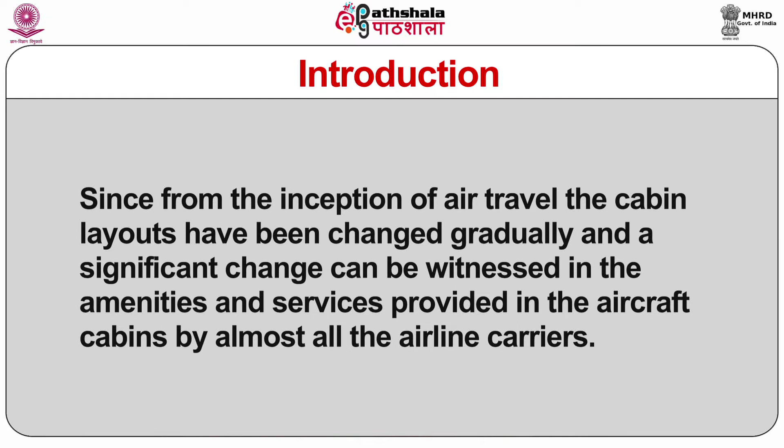Dear students, the aviation industry is now not only a means of travel but also provides a luxurious 5-star category experience at an altitude of 45,000 feet. Since the inception of air travel, cabin layouts have changed gradually, and a significant change can be witnessed in the amenities and services provided in aircraft cabins by almost all airline carriers. Air travel is perhaps preferred as the most convenient, safer and faster medium of travel, even to the remotest areas around the world.

Passengers travel in the passenger cabins of aircrafts. Airline carriers provide ultra-modern services and amenities to passengers to make their journey a memorable experience. Various passenger carrier airlines, due to growing competition, have come up with innovative cabin facilities to attract more passengers. The present module shall discuss various cabin classes meant for passengers, and it shall also discuss the various layouts of the cabins.

Dear students, let us now take up commercial aircraft cabin layouts with features. Aircraft cabin refers to the section or place where the passenger sits while traveling in the aircraft. Passengers may feel uncomfortable while sitting or traveling due to the congested sitting plan in the cabin.

Cabins used in commercial airlines are divided into various parts or sections on the basis of the class of travelers, areas for flight attendants, space for storage, and galley for in-flight services. The seats of commercial flights are arranged in rows and aisles. The sections or seats are divided into various parts, usually by using curtains or sometimes class dividers as well. Passengers who are supposed to occupy lower class seats are not allowed to sit in the higher class cabins in commercial flights.

The facility of a common screen is available in short-haul cabins, but in long-haul and ultra-long-haul flights, passengers often have their own personal screens in their cabins.

All the parts of the flight are held by the body of the airplane, or fuselage. The pilots of the plane sit at the front of the fuselage, also called the cockpit. It is the area near the front door of the plane, and the pilot controls the plane from there. These days, most aircrafts are also enclosed, except smaller charter planes.

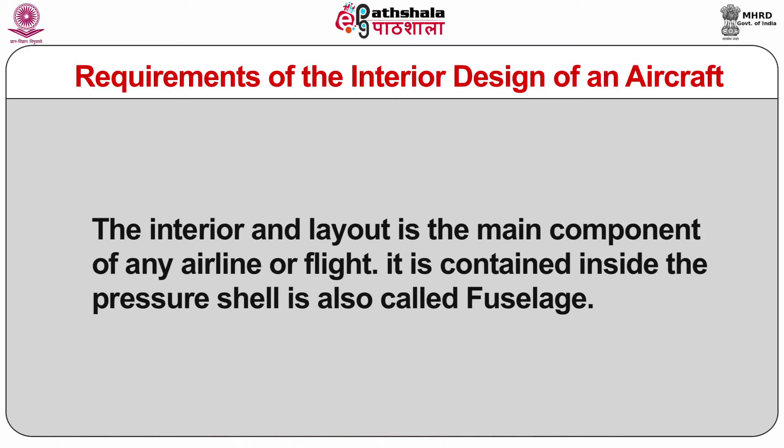Let us now discuss the requirements of the interior design of an aircraft. The interior and layout is the main component of any airline or flight. It is contained inside the pressure shell, also called the fuselage. Regulatory Part 25 of FAR generally applies to it.

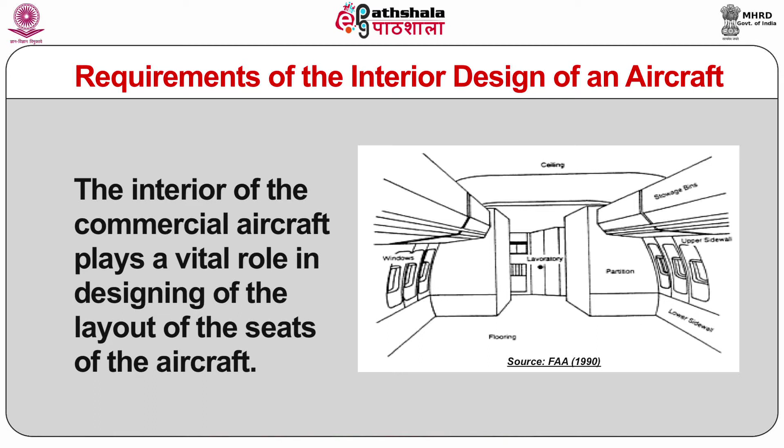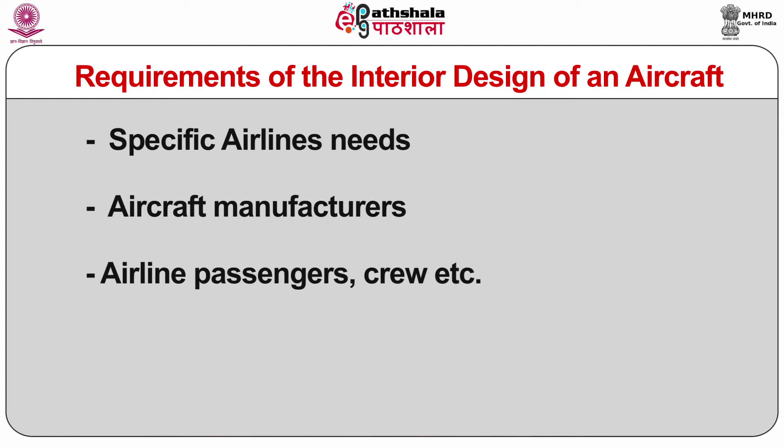The interiors of commercial aircraft play a vital role in designing the layout of the seats. The aircraft interior should meet various requirements including specific airline needs, aircraft manufacturers, airline passengers, crew, and the FAA and other regulatory agencies in the aviation industry. An aircraft interior is designed to meet all of these requirements together.

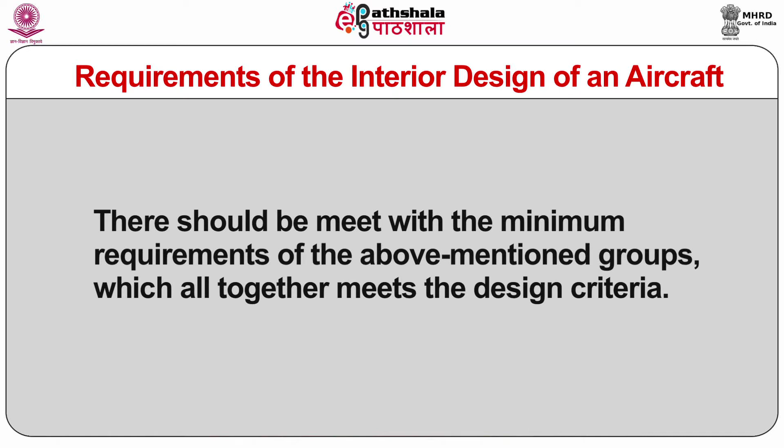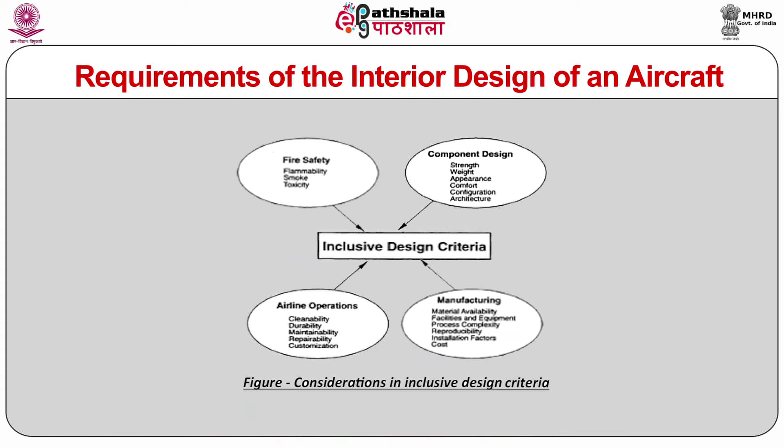These should meet the minimum requirements of the above mentioned groups, which altogether meet the design criteria. There are various issues to be considered for the inclusive design criteria, as can be seen in the figure. It includes fire safety, flammability, smoke and toxicity. Component design includes strength of the interiors, weight, appearance, comfort, configuration, architecture, etc. Airline operations include cleanability, durability, maintainability, customization, etc. Manufacturing also includes material availability, facilities and equipment, process complexity, reproducibility and installation factors.

The safety norms laid down by the FAA are mandatory for aircraft design or layout, and these may be quantified by designers as per the needs of the FAA. On the other side, there are certain non-regulatory requirements which are not possible to quantify, like seat comfort for the passengers, and this also makes the job of the designer tough.

Let us now discuss the materials of construction. Materials are classified into various categories for the design of the interiors of the aircraft.

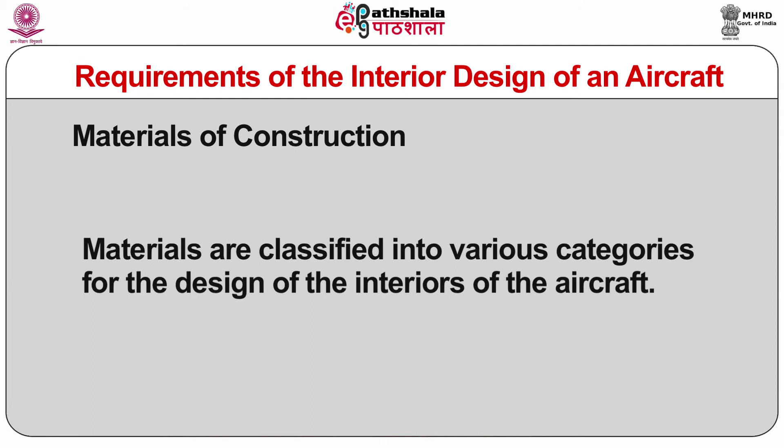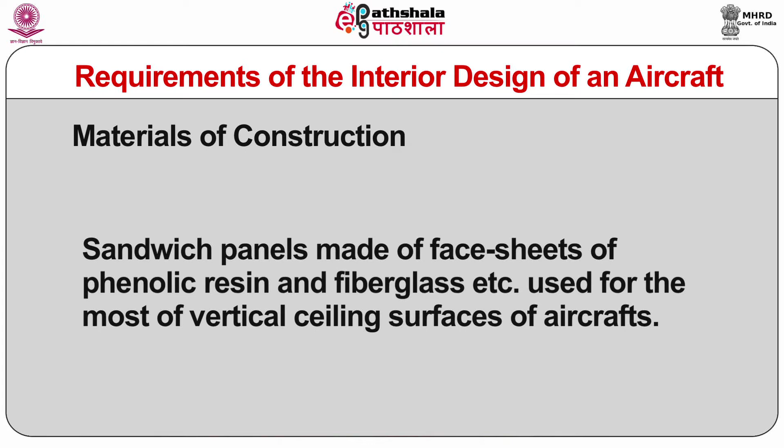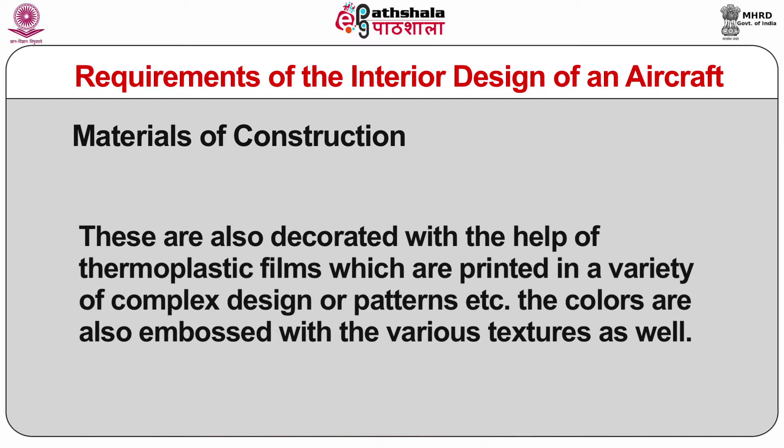Sandwich panels made of face sheets of phenolic resin and fiberglass are used mostly on the vertical ceiling surfaces of aircraft. These are also decorated with thermoplastic films printed in a variety of complex designs or patterns. The colors are also embossed with various textures as well. All these things, like color or pattern of films, depend upon the exact requirements of the airlines.

The materials mostly used for designing the upholstery and drapery have been fire-retardant wool and also fire-retardant polyester, both fire-resistant materials. On the contrary, tapestries need to follow very stringent flammability requirements or guidelines, like wool, and therefore it has been replaced by the usage of synthetic materials.

The following table summarizes the various materials or types used in various applications. There are numerous other material types used in various applications. The examples are summarized as follows: the materials and applications in current commercial aircraft.

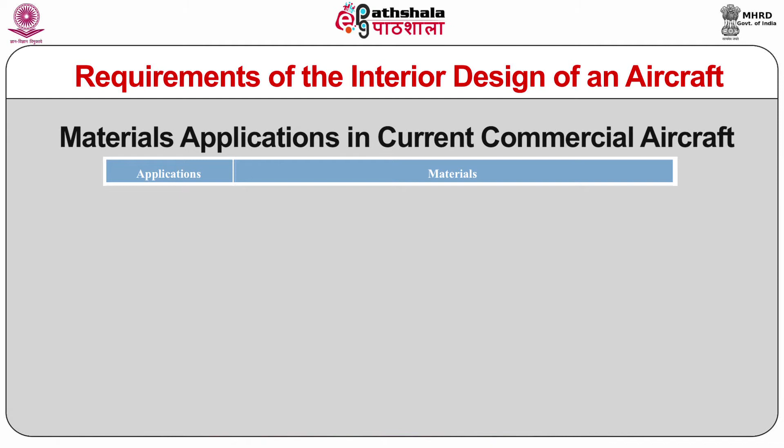On your left hand side you will find the applications, and on your right hand side the materials. The applications are made of that material. For manufacturing applications like lower side wall panels, materials used include phenolic or glass or carbon, Nomex honeycomb plus scuff resistant surface such as wool or Nomex fabric or tough plastic.

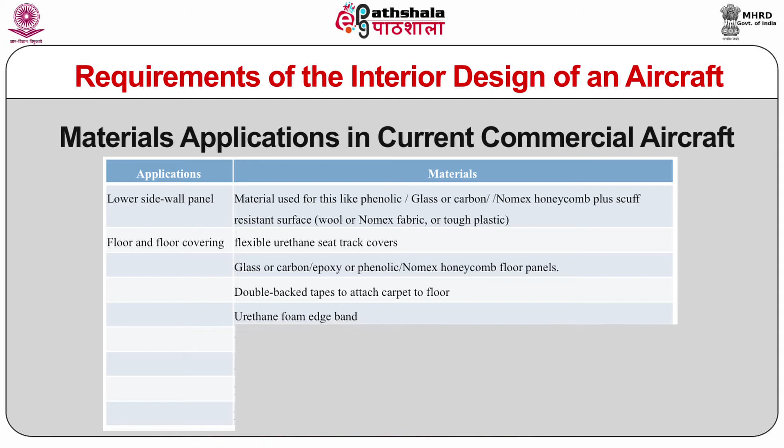For the floor and floor covering, the materials required are flexible urethane seat track covers, glass or carbon or epoxy or phenolic or Nomex honeycomb floor panels, double-backed tapes to attach carpets to the floor, urethane foam edge band, wool or nylon carpet, mylar film over galley and entry floor panels, Nomex felt underlay as customer request, and polyvinyl chloride on the galley mats.

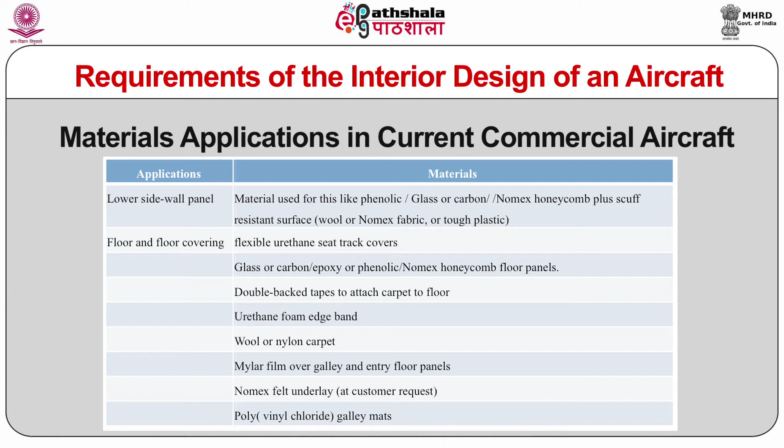For making upper side wall panels, materials like glass or carbon or phenolic or decorative thermoplastic layer plus Tedlar are used. For the light covers, polycarbonates are used.

For making applications like overhead stowage bins, materials like glass or carbon or phenolic or Nomex honeycomb plus edge urethane foam layer plus reinforcement of the same are required.

For applications like passenger and cabin attendant seats, polybenzimidazole or Nomex or Kevlar blocking layer is required. Then urethane foam cushions, wool or nylon or leather upholstery, thermoplastic seat trays, and polythene flotation foam is required. To make gap fillers, materials like silicone or urethane are required.

For applications like stowage bins, the materials required are glass or carbon or phenolic or Nomex honeycomb, decorative thermoplastic laminate, wool textile interior lining as required. For placards, polyvinyl chloride or urethane is required.

For partitions in the aircraft cabins, glass or carbon or Nomex honeycomb, decorative thermoplastic laminate, or wool or Nomex textile or leather is required. In addition, polycarbonate transparent windscreen is also required.

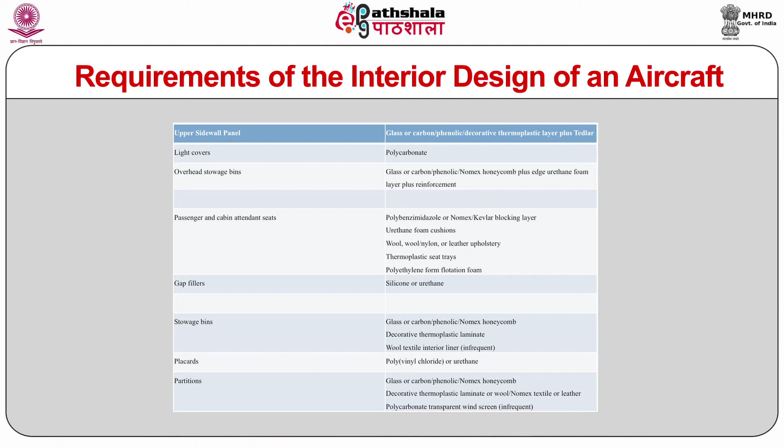For making windows of the aircraft cabins, the inner pane cast is acrylic, and the outer pane stretched is acrylic. The dust cover is made up of polycarbonate or acrylic.

To make the passenger service units, materials used include aluminium, molded thermoplastics which include Radel, Ultem, polyethylene, and glass or carbon or phenolic.

For purpose of insulation, fiberglass bat or phenolic binder, mylar cover, polyvinyl chloride, nitrile rubber, polythene foams, and polyamide foams are required. Then to make the air ducts, materials such as glass or silicone are required.

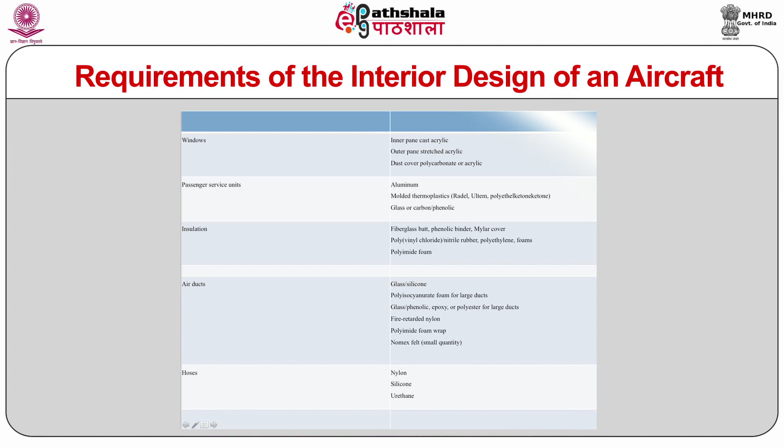Let us now discuss various safety standards. The minimum safety standards for manufacture, aircraft design and operations are established by FAA. These need to be met at the minimum but also go beyond the minimum requirements of the safety standards laid by Boeing Commercial Airplane Group in 1997 and Airbus Industries in 1979.

There are other criteria related to non-crash activities and crash-related activities developed for interior safety requirements. These include fire resistance, emergency evacuation, emergency oxygen systems, and structural strength and stiffness, etc.

Fire resistance and flammability mandates for transport are listed in FAR 25.853, FAR 25.869, and FAR 25.855. It relates mostly to furnishings, including cabin liners, seats and cargo, etc. The regulations also cover individual parts of the interior like ceilings, side walls, partitions, windows, air ducts, stowage bins and insulation, etc.

Most of the regulations on safety are framed by the FAA Safer Committee. This committee generally focuses on and suggests various ways to survive after crash fires.

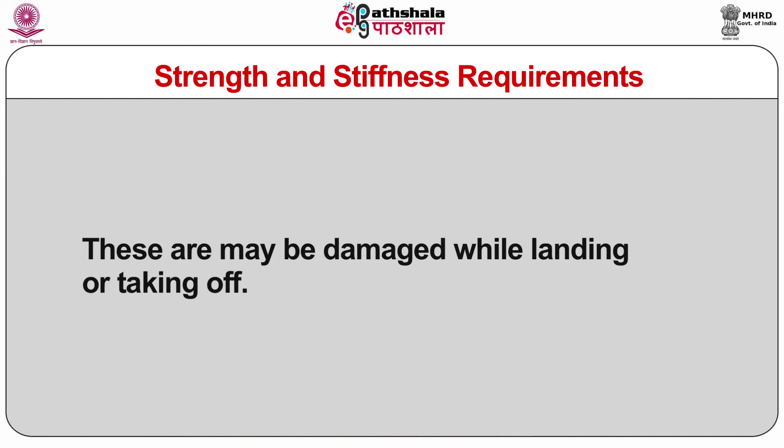Each and every component should be designed in a way so that the passengers may not get injuries. Each and every passenger should be protected while traveling.

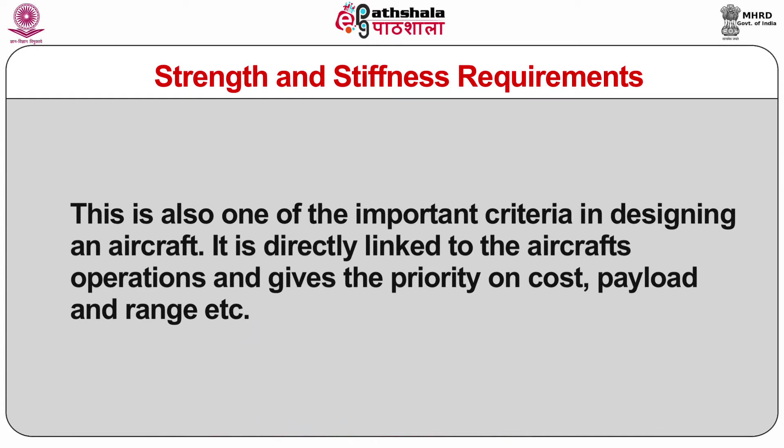The next one is the weight. This is also one of the important criteria in designing an aircraft. It is directly linked to the aircraft's operations and gives priority on cost, payload and range, etc. Then the next is the cost.

Cost is another critical criteria in designing an aircraft, directly linked with the total cost of the aircraft. The designer should take into account the cost of procuring and maintaining an aircraft while deciding the cost of designing it. Then the next one is manufacturability and producibility.

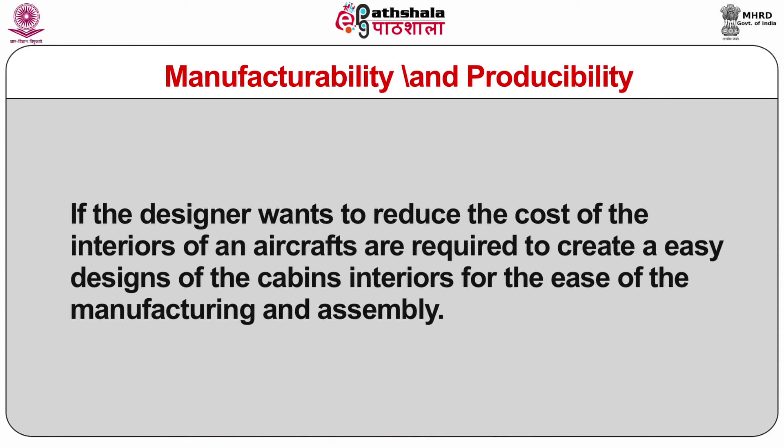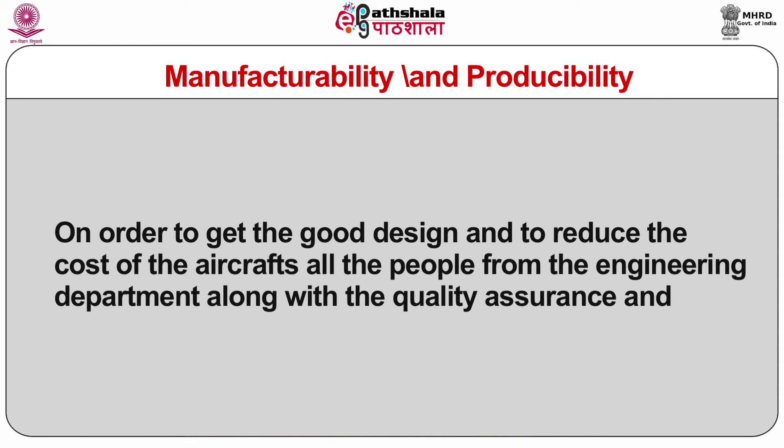If the designer wants to reduce the cost of the interiors of an aircraft, they are required to create easy designs of the cabin's interiors for ease of manufacturing and assembling. In order to get a good design and reduce the cost of the aircraft, people from engineering, quality assurance and manufacturing should come forward with concrete suggestions and work together.

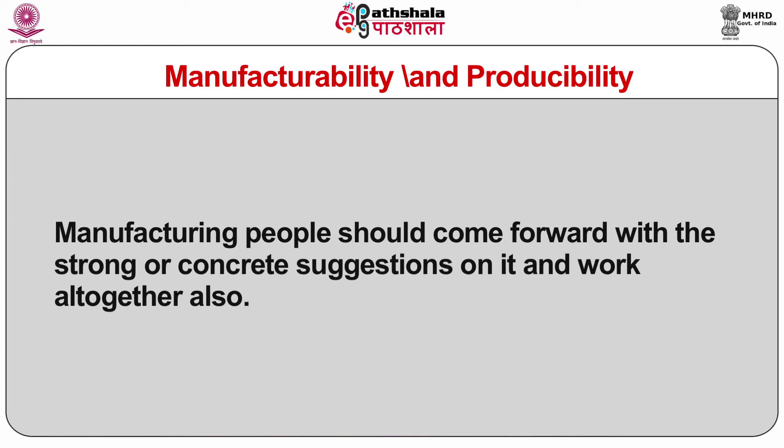They may decide about the various components required for the final part, like functions, quantity required and other design criteria, and also about the possibilities of the materials and processes, like material cost, capital equipment and processing labor, etc.

For the fabrication of components for current aircraft cabins, composite lamination followed by press curing is used. Then the next one is processing equipment and tools.

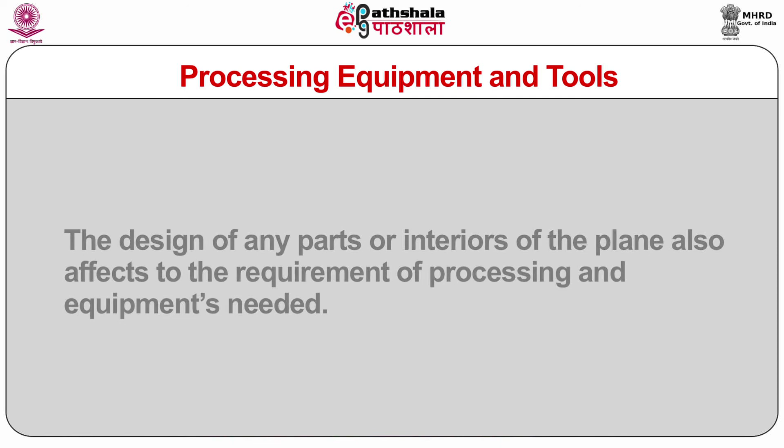The design of any parts or interiors of the plane also affects the requirement of processing and equipment needed. It is not only affected by tool selection but also by the quantity of parts needed to be produced.

Then the next is comfort. There is no doubt that the interior layout, components, comfort and materials properties play an important role in providing comfort to the passengers. Seat comfort is also considered for providing comfort to the passengers.

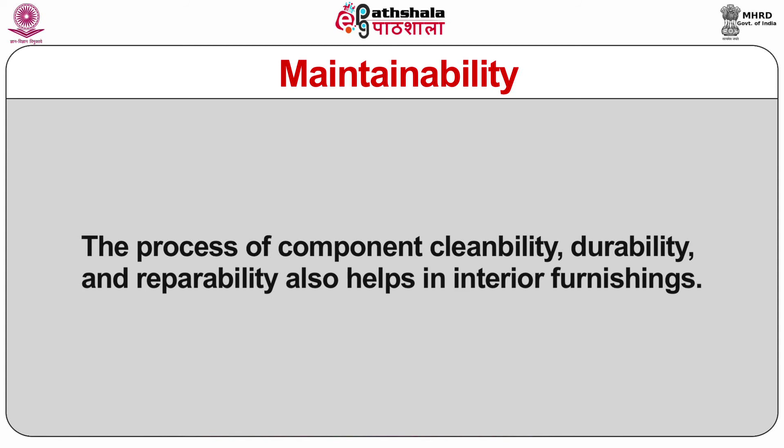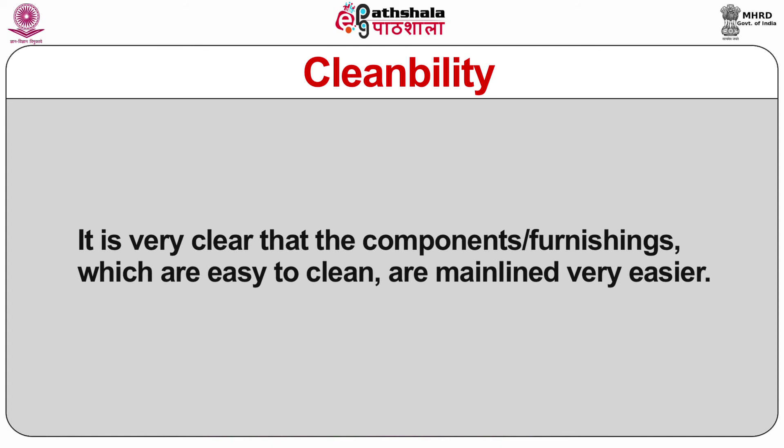Then the next one is cleanability. It is very clear that components or furnishings which are easy to clean are maintained more easily. So the designer should recommend parts which require a very easy maintenance program.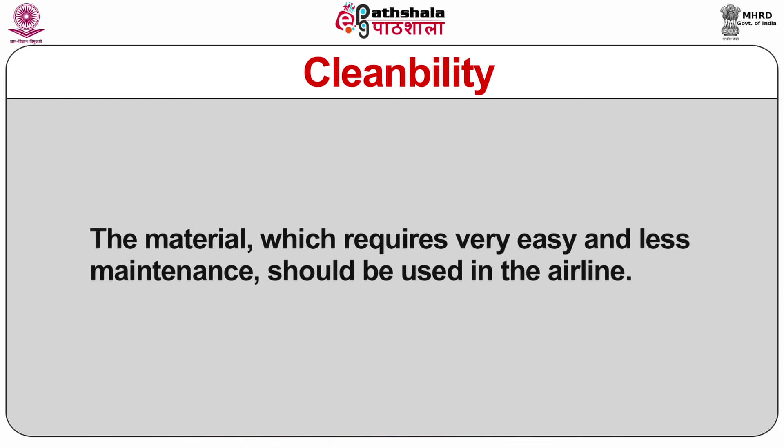The material which requires very easy and less maintenance should be used in the airline. The parts which attract more dirt and mud, etc., should be avoided for the manufacturing process of the aircraft.

The parts before being installed or used should be tested for cleanability. In short, a stain-resistant agent should be used by which it is easy to remove any dirt or stains from the seats or the galleys, etc. Flooring in some areas such as galleys, entryways and lavatories must be water resistant, skid resistant and easily cleanable, for sanitary as well as aesthetic reasons.

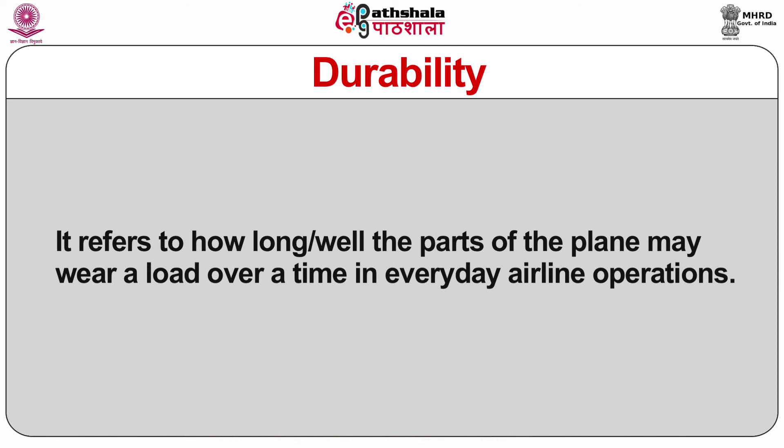Then the next is durability. It refers to how long or well the parts of the plane may wear or bear load over time in everyday airline operations. The designer should consider the durability of the parts as well as in designing the cabins of the commercial plane.

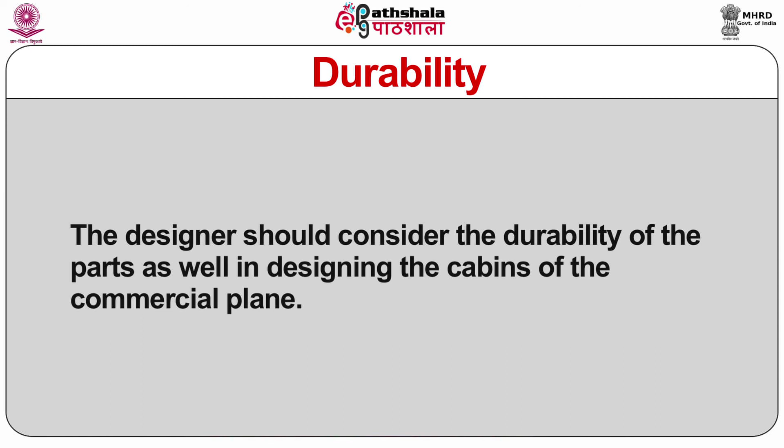The various factors included are color fastness to light, resistance to vibration, resistance to cracking, resistance to tearing, fluid resistance (for example, solvents and cleaning fluids), dimensional stability, resistance to water and moisture absorption, resistance to permanent staining, resistance to corrosion, resistance to water wicking and resistance to impact damage. It may also include resistance to fungus attack, resistance to crazing and resistance to abrasion damage.

Dear students, let us now take the case study of Airbus A380 for better understanding. Let us discuss the case study of A380, the largest commercial aircraft in the world, and also discuss its in-flight cabin features and comfort features for the passengers traveling in it.

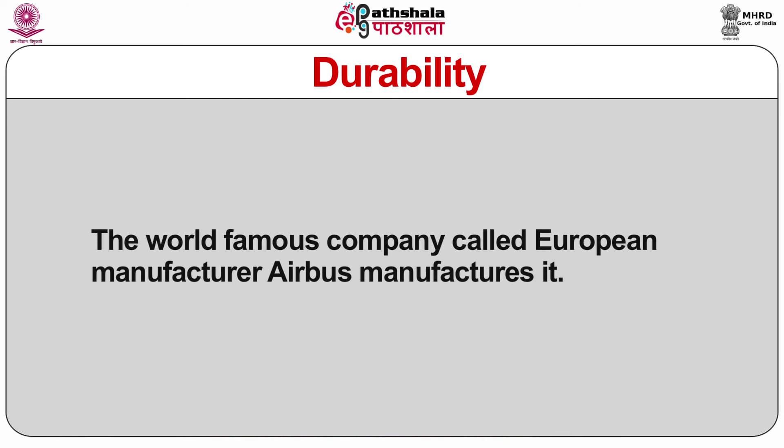It is a double deck aircraft with a wide body along with 4 jet engines, manufactured by the world-famous European manufacturer Airbus. Its earlier name was Airbus A3XX, and it was designed to offer a challenge to Boeing's larger aircraft. It started its first flight on 27th April 2005, and later on 25th October 2007, it started its commercial services in the aviation sector.

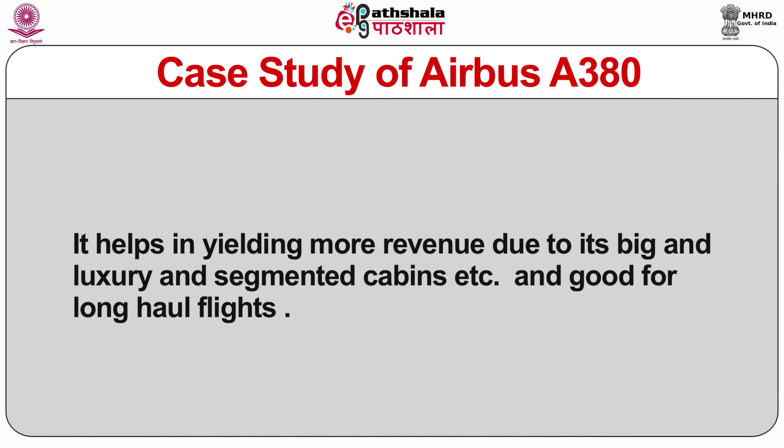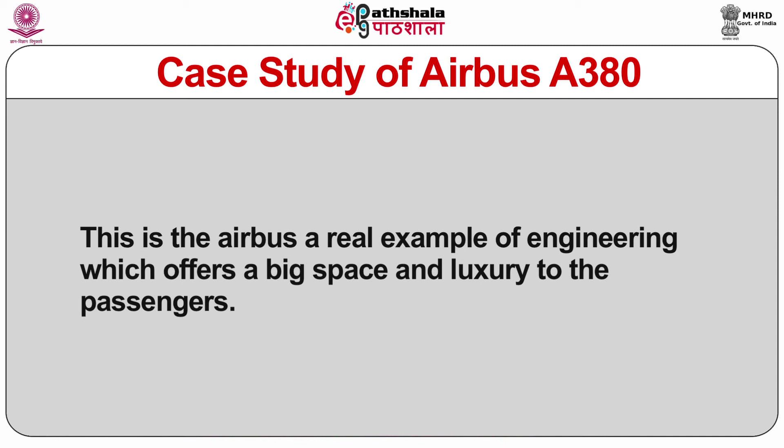This is manufactured for the 21st century aviation industry because its big and unique size helps in getting more people into it than any other airline options available. It helps in yielding more revenue due to its big, luxury, and segmented cabins, and is good for long haul flights. It is now one of the favorite choices due to the large space available for legs or luggage, and the relaxing environment for passengers across the world, where the cabins allow all passengers to stretch their legs while on their seats. This Airbus is a real example of engineering that offers big space and luxury to passengers.

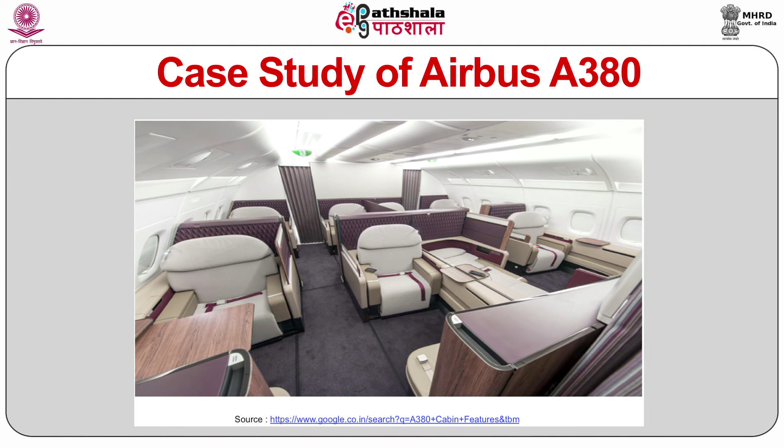The main cabin features of the Airbus A380 are summed up as follows. It has the most comfortable interior that allows its operators to remain at the pinnacle of elegant air travel. It provides enough boot space or leg space to stretch their legs, and 18-inch wide seats for the comfort of its travelers.

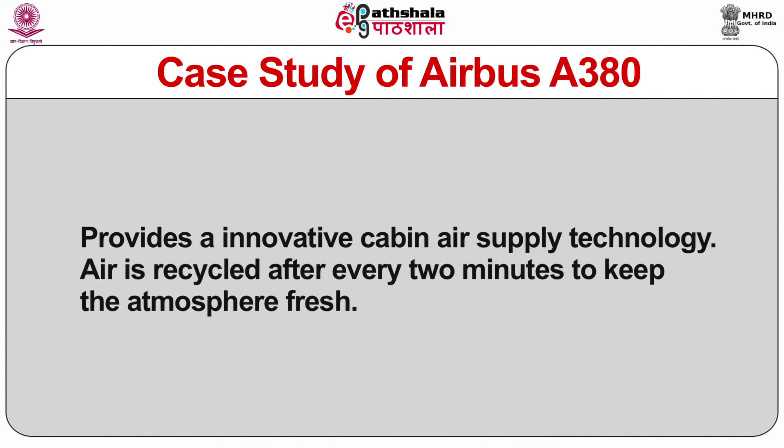Beautification with different cabin lights, but also natural light by 220 cabin windows and 6 high-level air outlets, as opposed to the standard of keeping at least 2 air outlets. It provides innovative cabin air supply technology; air is recycled after every 2 minutes to keep the atmosphere fresh. It has 6 high-level air outlets as opposed to the industry standard of 2, which keeps customers refreshed during all phases of the flight.

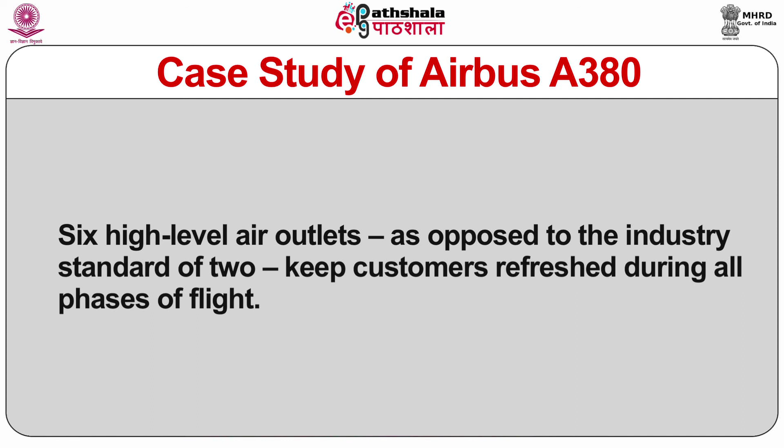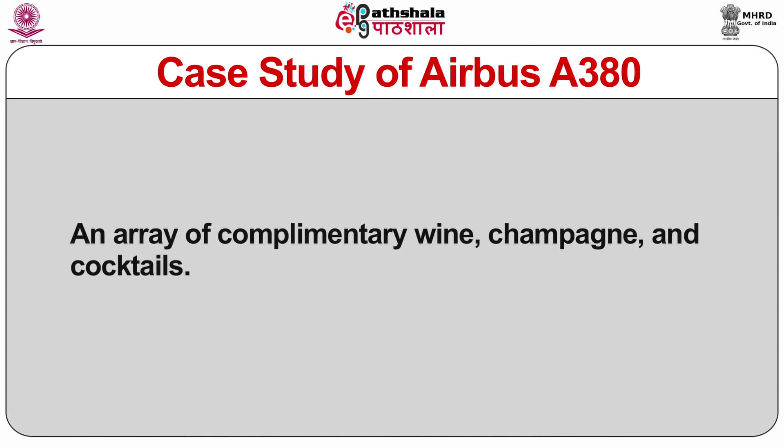In business class, the seats are convertible into beds, which offers excellent luxury to travelers. It has optimal cabin length and provides at least 15% more space offered to travelers for personal use. It also offers a personal mini bar, an array of complimentary wine, champagne and cocktails, and privacy doors that allow for unwinding.

Dear students, let us now summarize what we have discussed in the present module. Aircraft cabin refers to the section or place where the passenger sits while traveling in the aircraft. Passengers may feel uncomfortable while sitting or traveling due to the congested seating plan in the cabin.

Cabins used in commercial airlines are divided into various parts or sections based on the class of travelers, areas for flight attendants, space for storage, and galley for in-flight services. The seats of commercial flights are arranged in rows and galleys. The sections are divided into various parts, usually by using curtains, or sometimes class dividers as well. Passengers who occupy lower class seats are not allowed to sit in the higher class cabins in commercial flights.

The cabin class refers to the class of service that the passenger may expect on the plane from the airline company. It depends upon the type of class, like economy, business, or first class. Passengers are served as per the class of tickets they have purchased.

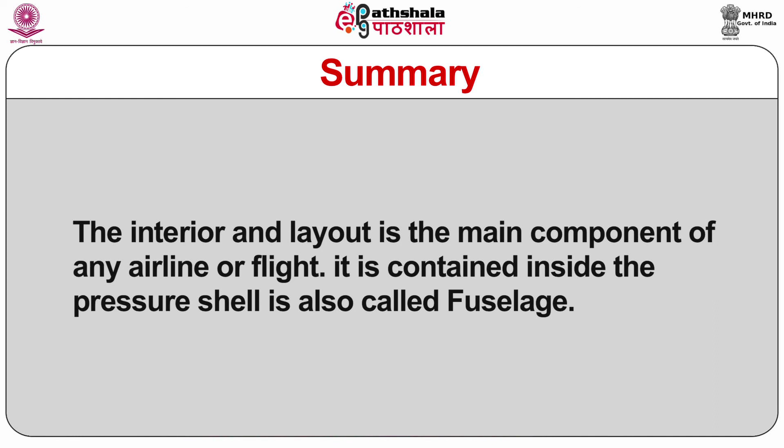The interior and layout is the main component of any airline or flight. It is contained inside the pressure shell, also called fuselage. The interior of the commercial aircraft plays a crucial role in designing the layout of the seats of the aircraft. The aircraft interior should meet various requirements, like specific airline needs, aircraft manufacturers, and the airline passengers and crew, etc. With these words, I sum up this module.